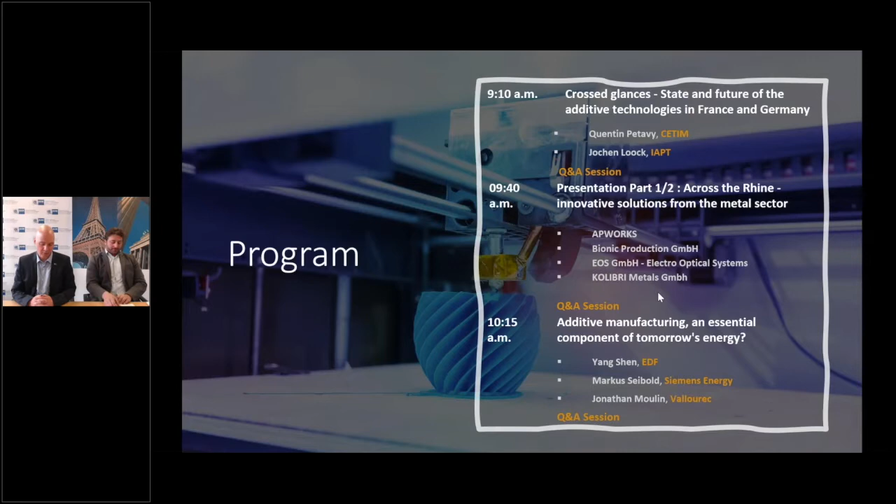I would also like to remind that this is the 7th event in a row which turns around the digitalization and the industry 4.0. And you all know how important that aspect is in current life. And I think we also see how the coronavirus and all the pandemic development has even now accelerated, in many ways and areas, that industry and that technology.

And interesting enough, it's, as we all know, not only affecting one industry. This is really a broad issue covering all industry, all branches. And we also see that it is affecting a lot of companies, from startup companies having developed maybe a competence, a technology in one area, but also large companies, as we will see during the next 2 days.

Maybe to remind you just who we are, the French-German Chamber of Commerce here in France. We are about 900 members on both sides of the Rhine. We are covering all industrial areas. Therefore, once again, I think this topic is very relevant because it speaks to a lot of our members, to a lot of our customers as well, who are really affected and dealing on a day-to-day basis with that technology.

Just about my background, I have a master's degree in mechanical engineering at the National Engineering School of Saint-Etienne, in which the last year was dedicated to additive manufacturing, where I was redesigning ball bearings for the automotive industry for additive manufacturing. I then joined CETIM as additive manufacturing engineer to work on the metal binder jetting process. And I'm currently involved in the Additive Factory Hub platform, as Guillaume said, to work on laser powder bed fusion and more specifically on the wire arc additive manufacturing process. So now I will present CETIM and CETIM activities. We can go to the next one, please.

So just a few words about CETIM. CETIM is a technical center for mechanical industry, which is situated in many parts of France in order to be the closest to the French industry. It was created in 1965 upon request from French mechanical industry in order to improve their competitiveness.

It is a regional, national, and international player with more than 1,000 people working there, with a turnover around 150 million, which is divided in two parts: a private research and development activity for companies and collective research and development activity for all the French industry.

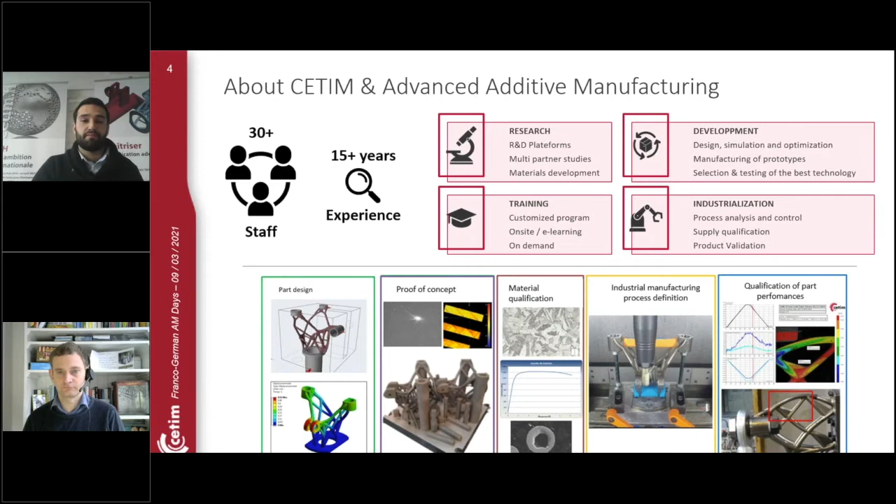So as you can see at the bottom, from the design, generative design, simulation and optimization, to manufacturing, proof of concept, and then selecting and testing the best technology for your product. We can do training, which is customized programs, on-site, and e-learning as well. And we can go on to industrialization and qualification of the product to product validation. So I will give the floor to Jochen.

Thank you. So my name is Jochen Loock. I'm working at the Fraunhofer IAPT. For 4.5 years I was responsible here for the academy, but recently I changed my activities into business development and consultancy for automotive. And it's a pleasure for me to shortly introduce our institute and then discuss some trends here.

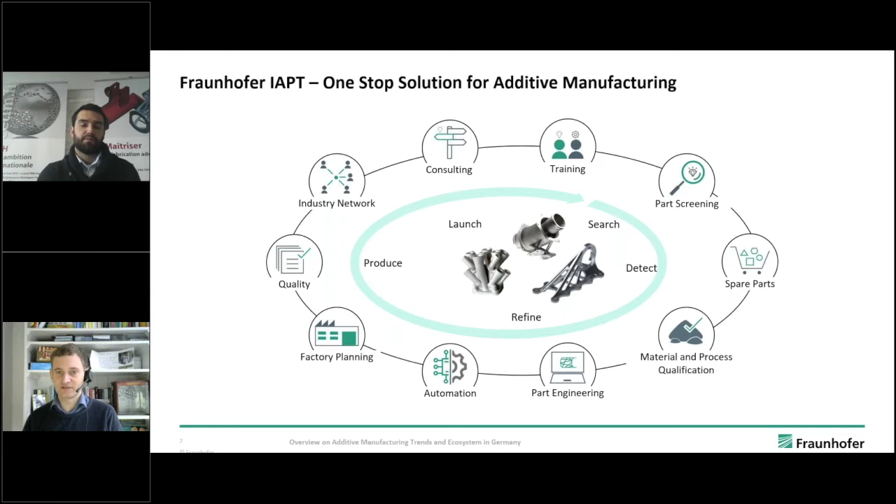So our institute, Fraunhofer IAPT, stands for Additive Production Technologies. It's located in Hamburg, and I think we are well known for our pilot projects with industrial partners that we have done in the past, also recently. Our services include everything that is needed to implement additive manufacturing, starting with training and part screening services, going into engineering of parts, automation of post-processing, and quality assurance. So we are covering everything that is needed for industrialization of additive manufacturing.

So just a few words about the general market landscape in France. The French ecosystem is composed of mechanical companies, which gather machine manufacturers, manufacturing services, software suppliers, research institutes, and universities. It's kind of the same ecosystem as in Germany; Jochen will explain it later. But for some processes, maybe it's less mature, such as laser powder bed fusion.

A fact in France is that democratization and appropriation of additive manufacturing in industry requires large and multidisciplinary research and development skills. And there are few private companies that can develop research and development programs by themselves.

With the COVID crisis and with liquidity problems, it's necessary to coordinate, mutualize and share resources and problems on additive manufacturing research and development topics in order to ensure the development of the sector. And that's why CETIM is a key partner of this ecosystem, regionally and nationally. And we are coordinating different activities in which we are mutualizing research and development activity.

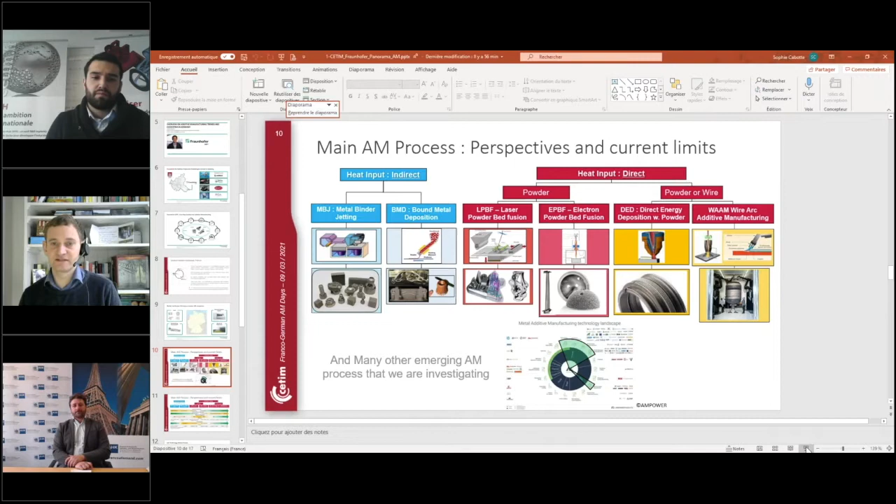So what I see in terms of technology is that laser powder bed fusion matured a lot over the last years, and it's still not where conventional manufacturing technologies are, but I think we have a baseline maturity that is sufficient for small serial production, for example in aerospace and automotive, or at least very close to it. Some players are a little bit in front, some a little bit behind.

And I think there are also new technologies in metals that are getting maybe in future, or maybe even now, some breakthrough. I see, for example, the DED process, which in my feeling is getting its breakthrough at the moment or very soon. We're seeing more and more applications here, and it's going out of the niche application of coating, for example.

Binder jetting is, I would say, maybe the hottest topic at the moment. It's highly investigated in automotive because it's scalable, and it's maybe the additive manufacturing process most likely to go into full-scale serial production, with a better cost advantage than laser powder bed fusion. I say maybe because there's still a question mark behind this, because binder jetting is not as mature yet as laser powder bed fusion and has to overcome some hurdles.

Also, I don't want to forget polymers, which are sometimes a little bit overlooked. I think most of the money that is earned today is actually earned in polymers. For polymers, it's really an established, cost-efficient alternative to injection molding for small lot sizes. So the projects I saw where a lot of money is saved are often polymer projects.

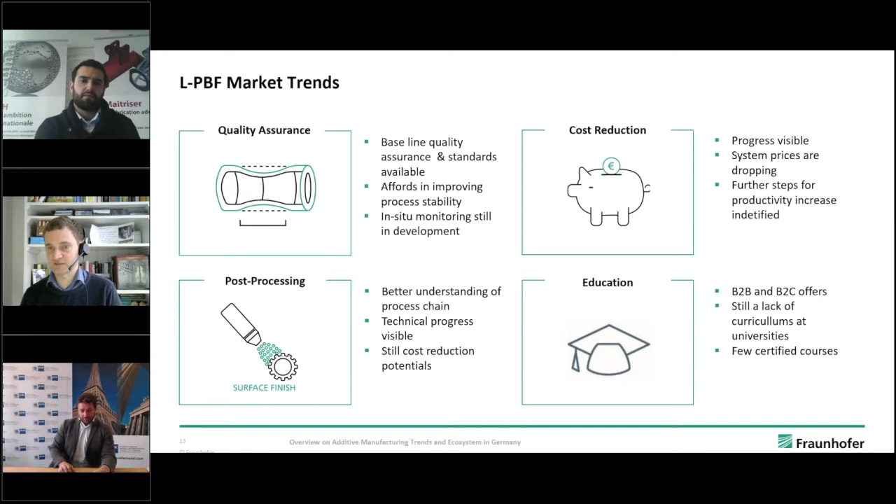Okay. Yeah, I think this is not 100% technology trend, so maybe it's good time for Quentin to continue. Yes, thank you very much, Jochen. I think it was your turn, Quentin, now to actually share your thoughts on technological trends. Yeah. Could we just go to the slide?

So as Jochen said, the cost reduction is really important in order to industrialize additive manufacturing. That's why indirect heat input processes are emerging, like metal binder jetting, which is scalable and could be a good process for mass production. It could be used for automotive, but for the moment it's a process that is not mature enough compared to laser powder bed fusion, and laser powder bed fusion is highly efficient when you're looking for performance. And there are other processes such as DED, which are really interesting for aerospace and energy sectors, in order to produce maintenance components or near-net shape components. And there are also other emerging additive manufacturing processes that need to be investigated.

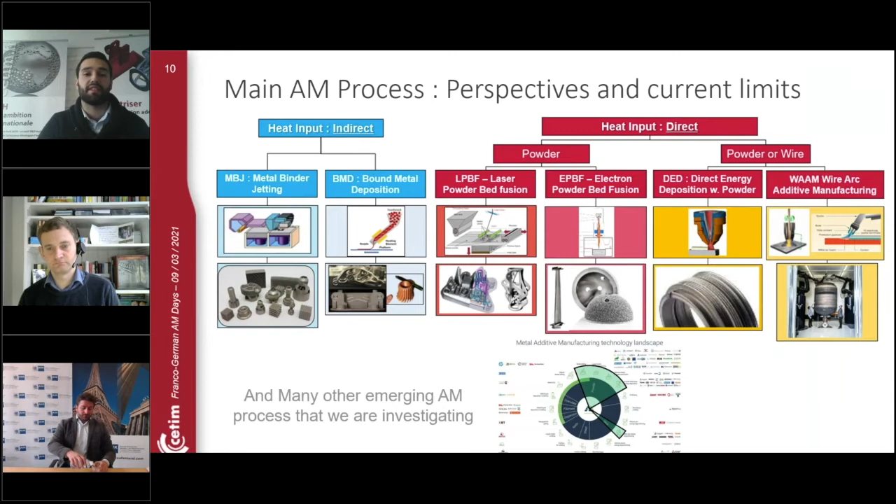So you have to keep in mind that before going to additive manufacturing, you have to select the right process depending on your product. If you're willing to do small parts, maybe binder jetting or laser powder bed fusion could be the right process. If you want to do large parts with several cubic meters, the DED process will be efficient for your application. Then the surface roughness is better for indirect processes, but it's a compromise with part performance.

And then you have to look at the productivity. For binder jetting, you can see that the productivity is around 100 cubic centimeters per hour, and the machine manufacturers say that it could go to 12,000, which is just an announcement for the moment, but it's really scalable. And then you have to choose between the cost of this technology.

Thank you very much, Quentin and Jochen, for this input. So you've already started answering a few points of the next question, which was perspectives and current limits of additive manufacturing. Are there any things you would like to add to what has been said, or would you like us to move to the success stories you wanted to present?

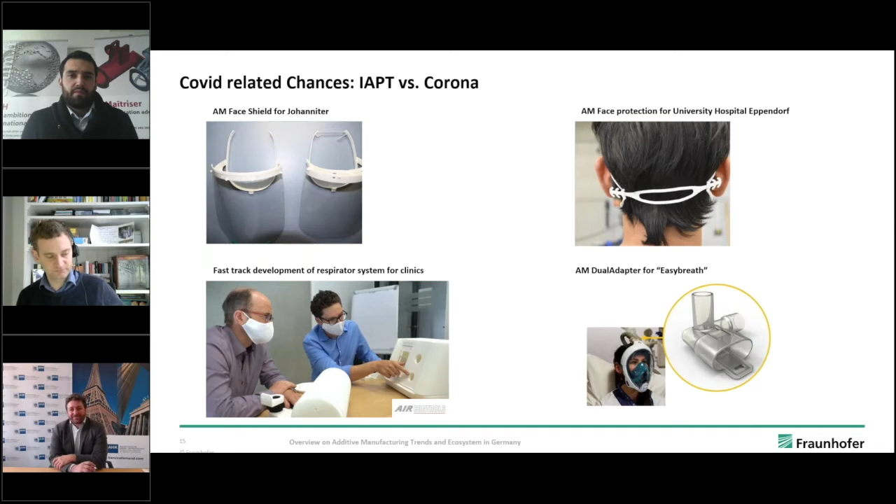So it's just to say that despite the COVID crisis, the companies that were involved in additive manufacturing keep working on it, and we have a few success stories in France. It's the case with Naval Group, a French company that has integrated its first additive manufacturing propeller made by WAAM on a French Navy boat, which is a really good thing. And Safran for aerospace plans to open its additive manufacturing plant in 2021 in France, next to Bordeaux. And even smaller companies keep working on it, as is the case with EAC, a luxury components manufacturer, which has integrated its first metal binder jetting to produce parts for industry.

So innovation has been slowed down due to the health and COVID crisis, and that's why it's also important to mutualize resources and share problems in order to ensure the development of additive manufacturing. Thank you very much, Quentin. It is true that, as you said, it goes through all sectors, and we do hope that it keeps going like this. And as you said, it would be good that people share their experience and knowledge in order to have the industry move forward.

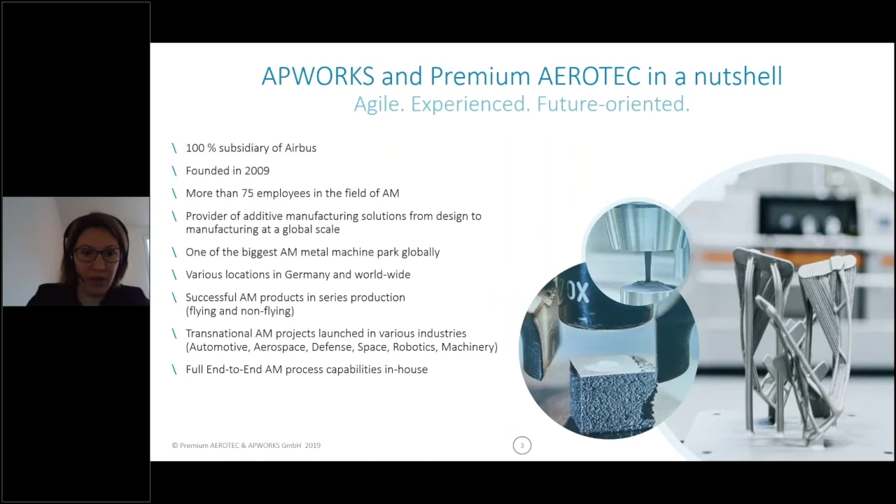So we have one of the biggest machine parks globally. Here you can see the 9 machines we are working with. We are dedicated to aluminum parts, Scalmalloy parts, and AlSi10 with quite a big chamber volume, like 400 times 400 times 400. We can support you from the beginning to the end, from the design of your part to improve the performance of your part. We have a dedicated engineering team for that, to the machining process. And every step of the production or of the development is done at one place. So this allows us to have very short lead times for our customers.

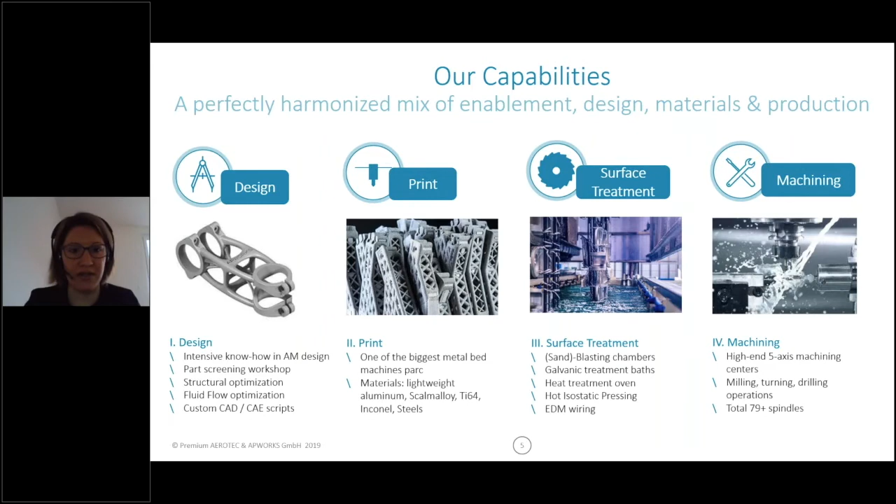To produce in a good quality is, of course, a good start, but we want it to be innovative. So these are typically the three directions we develop. Why can't you see my screen again? What happened?

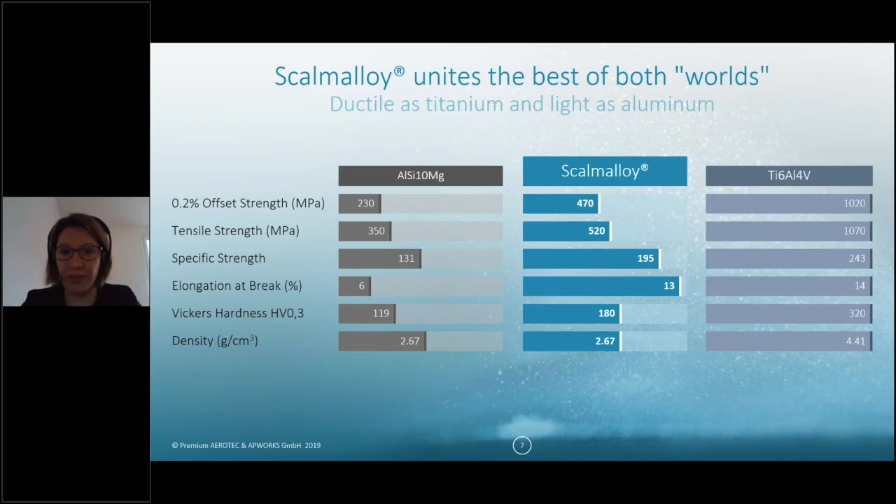So as I told you, we have three USPs. The first one is Scalmalloy, which is the strongest aluminum alloy, developed specially by Airbus for 3D printing applications. You will notice the specific strength, which is quite high for an aluminum, but you benefit also from good ductility similar to titanium. The next one is the 3D surfacing process, which improves the surface quality, because you know AM parts have a rough surface.

So this is a polishing process made with chemicals. And the last one is a system to join metal parts to composites. So we basically added some pins on the metal parts to make the junction. And of course, at Airbus, we did a lot of tests for this, and the tests show that the result is very good compared to the traditional way of bonding.

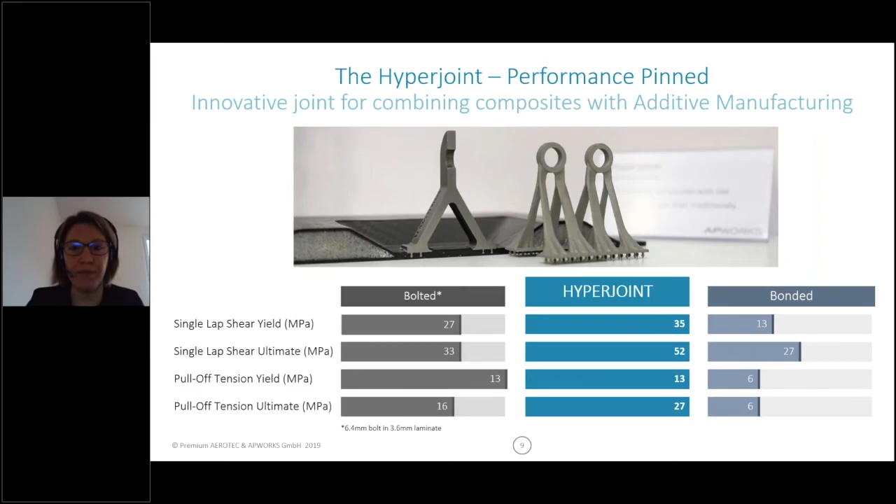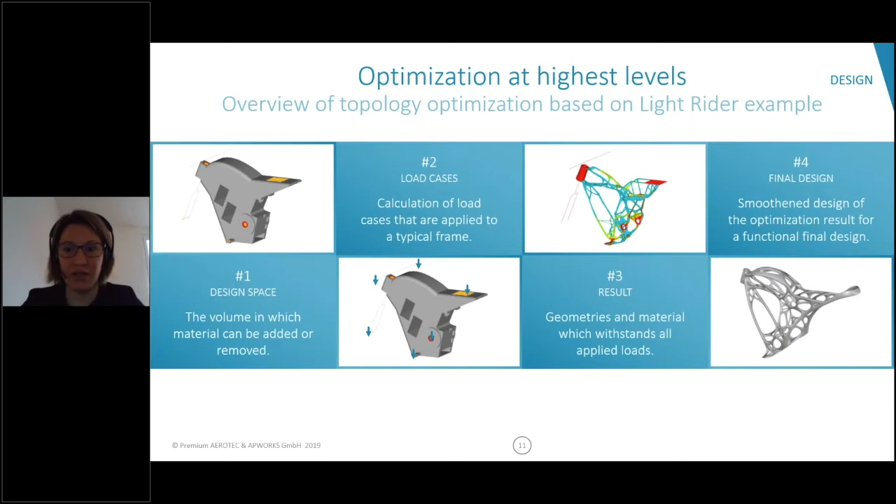So because of our origin, we focus first on aerospace applications, from military airplanes but also civil airplanes like the A350. A trend is, of course, the flying taxi. We equip the Airbus city taxi with this plate, and also some applications for satellites. Our process for titanium parts, as I said at the beginning, is fully qualified from the product to the NDT, according also to Airbus and EASA standards.

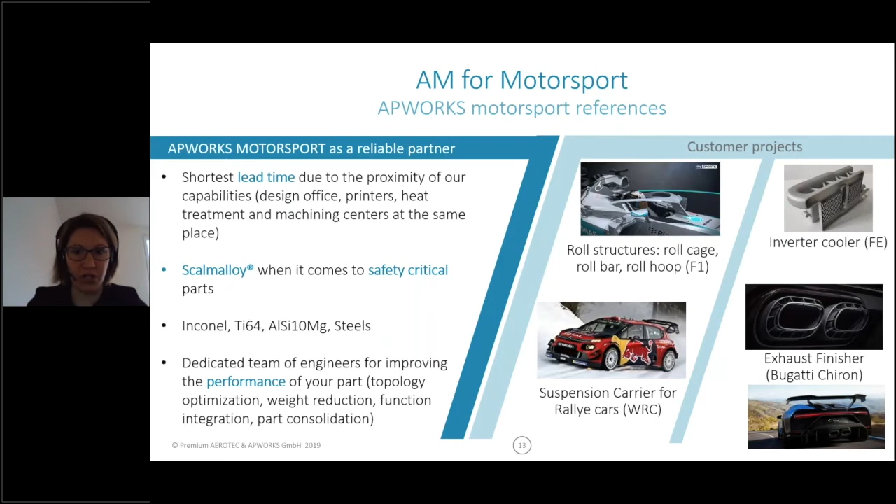The next field, which is also a big one, is motorsport, especially when it comes to shorter lead time. And Scalmalloy especially makes sense for safety critical parts like roll-over structures. And you may also have noticed our effort on the Bugatti exhaust finisher. Also some thermal applications with a lot of development work, and also for electronics components.

And the next and last one is about general industry. We are looking also at other fields like oil and gas, sailing racing boats, robotics parts as well. And we also developed last year this toolset in order to produce customized products. And we have, of course, many more customers.

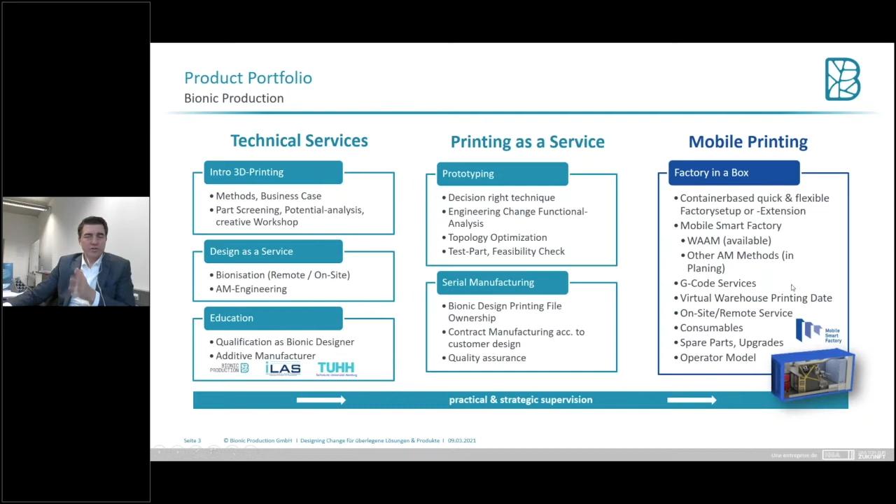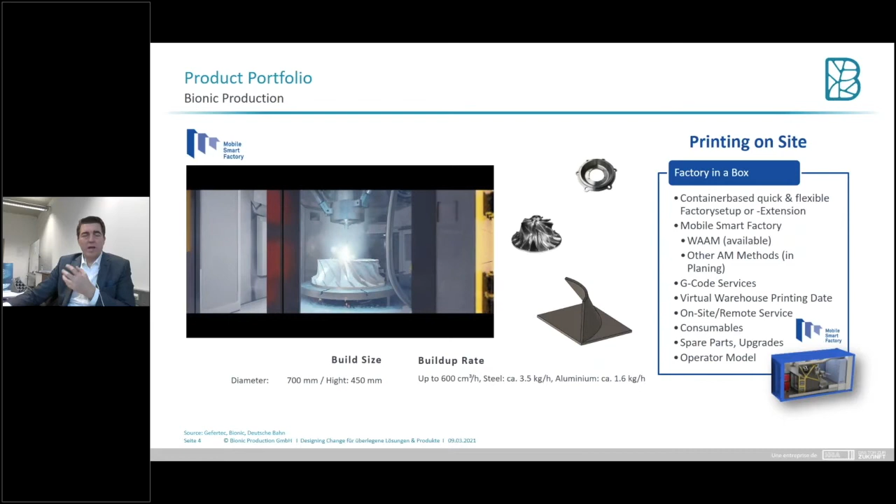The third step is mobile printing. That's a completely new business that we established roughly 1.5 years ago. In very easy words, it's a 3D printer in a container. This mobile system uses WAAM, wire arc additive manufacturing, where we can produce bigger components, as you see here in the middle, with dimensions of 700 by 450 millimeters. These components are very useful in the oil and gas industry, the mining industry, and the rail industry. The system is also very useful for hybrid repair jobs. And this system is also part of our business.

For example, we have a project running right now with a huge bus and truck company who is copying this concept into the front bumpers of their buses to have better results during the crash test. This is an idea, a pattern from nature that we copy into technology.

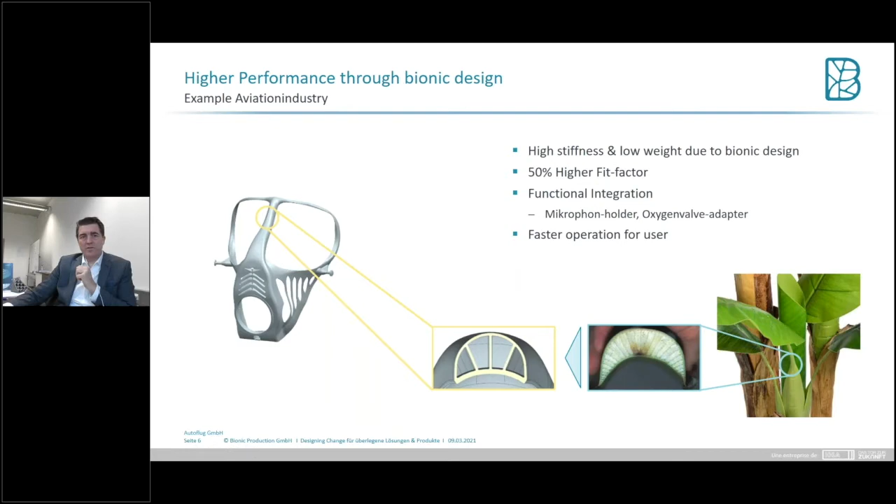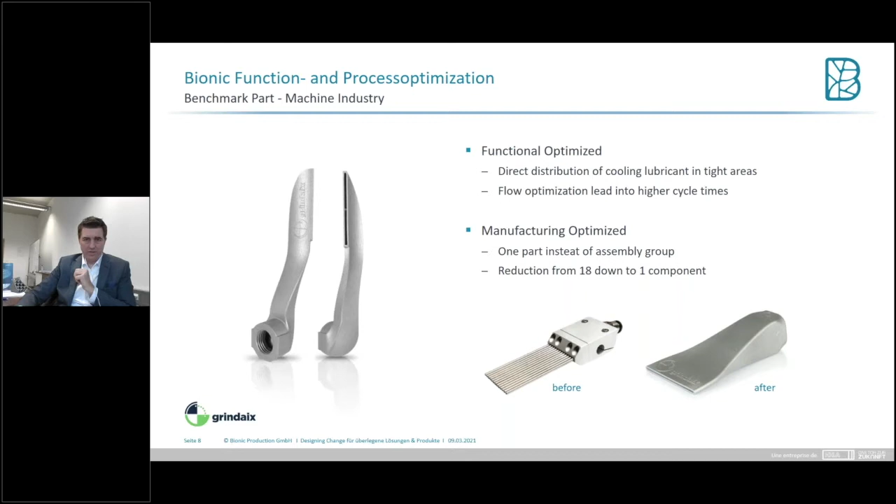Another example is for fluid and flow optimization. That's a nice example where we combine several components into one and have a better design of a cooling lubricant that can be transferred to the right point of use, and also achieve functional integration. That's classical AM design, combined with flow optimization from the bionic side. So that's all from my side.

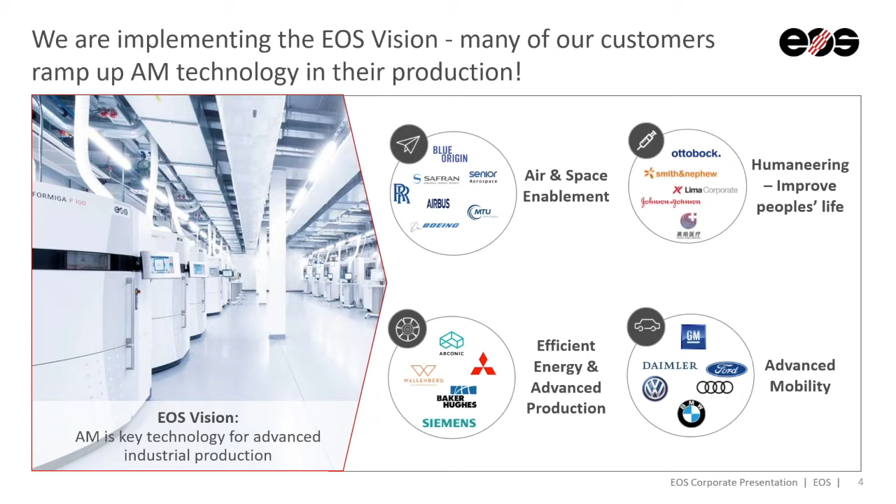What is our vision? Our vision is that additive manufacturing is the key technology for advanced industrial production and the key technology for digital factories of the future. As you can see, several customers have already ramped up this technology in their production along different industrial verticals, so aerospace, humaneering, mobility, and energy. And what do these industrial companies have in common? They are facing similar challenges such as faster time to market, productivity increase, need for cost reduction, flexible production, innovation, customization, and sustainability. And additive manufacturing is exactly providing unique advantages for those challenges.

As you can see here, three key advantages: freedom of design, so lightweight, bionic structures, as has also been explained before, functional integration, and customization. We have the freedom of materials, both, as I said, metal and polymers, and we have the freedom of manufacturing, digital manufacturing, but also, especially in the frame of COVID, becoming more important, distributed manufacturing. This means decentralized production.

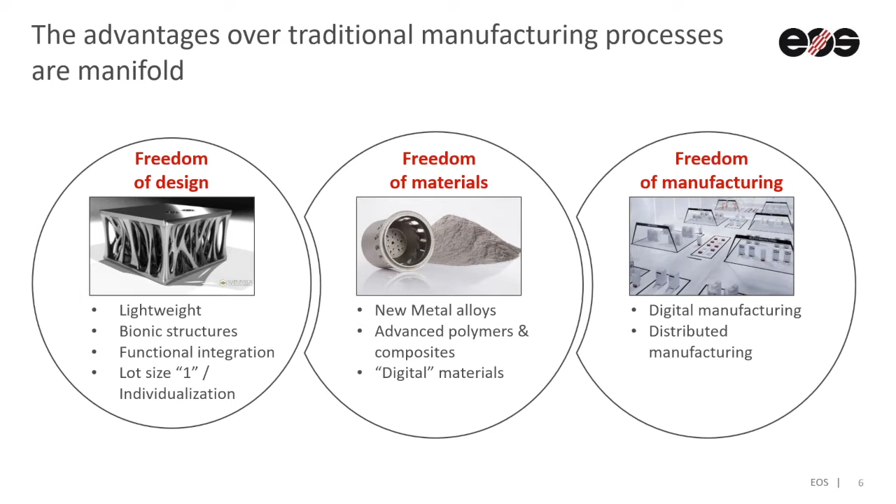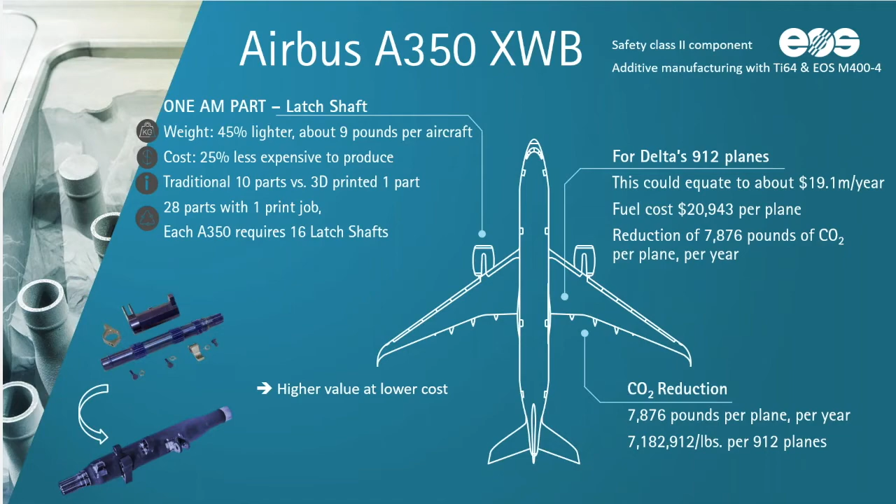We have several other examples, also in the humanitarian, medical, and energy, as well as in the polymer industries. Also the well-known mascara brush, where we were able to produce actually 80 million parts. So as you can see, the technology is a very democratic technology. It's crucial for small companies, for bigger companies, for small production, but also for bigger production lot sizes.

What's next is a peek into the lab, which I would like to share with you. So we are not talking anymore about 1, 2, 4, 12 lasers, but about 1 million laser diodes. That's our new technology, where we will be as productive as injection molding. So we can increase the production speed by factor 10. We have lowest cost per part. And that's a good example of how we can realize customization of mass-produced parts utilizing the benefits of 3D printing. Just to give you an indication, if you have a part the size of your fist, we will be able to print it in 9 seconds. And there you can derive that it's no difference if you print one part, 10, 100, whatsoever.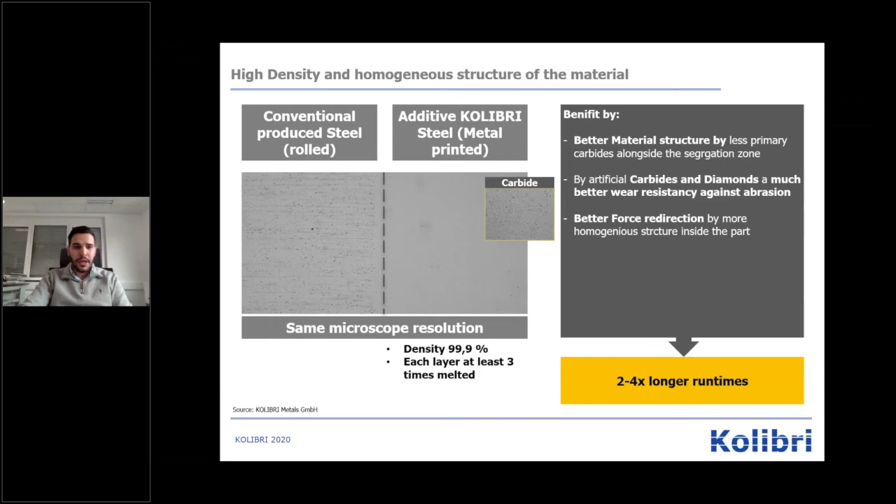And what we also do is we put into our material carbide or diamond powder to have a much better and higher hardness, which allows us to have much longer runtimes for our materials and for the parts we produce. And we also want to show you a classification of our material to give you an idea. You can see on the following slide that we have the same toughness and feed speed as coated HSS, for example 1.3343. And we have the same hardness as hard metal, and that makes our material pretty unique when it comes to wear resistance and hardness, of course.

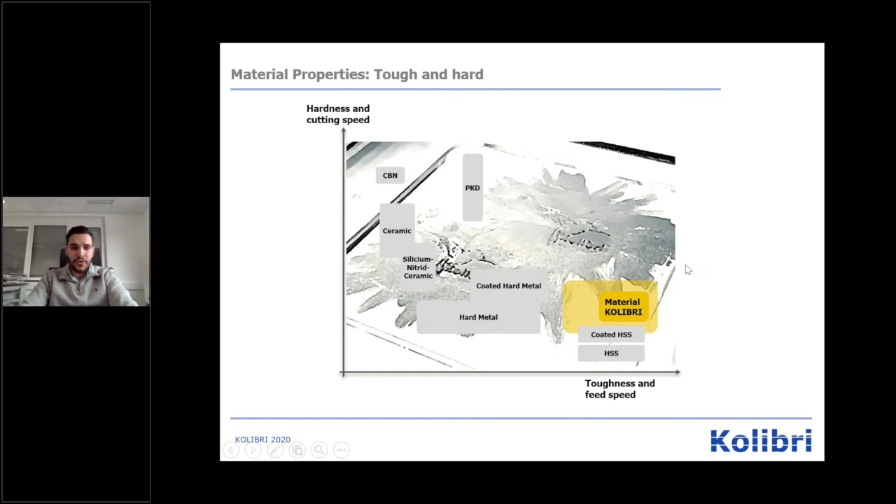It was really difficult to show you one example, but we decided to show you our roll jaws. Roll jaws are used for screw production, and we work with all the big manufacturers for screw production.

Do you still see my slide? Okay. Yes, we can. Please go ahead.

Yeah. Sorry. Like I said, it was really difficult to decide which showcase we would show you. But we do cooperate with all big manufacturers for screws. And what you can see on this slide is that we usually build these as hybrids, meaning we add our high value material on a grinded surface of a less valued material, which allows us huge lead time savings. For example, a roll jaw needs up to 8 or 12 weeks in development processes. We reduced that to 1 week, including heat treatment.

And we also noticed, since we worked with a lot of customers, that the material we mix, including carbides, is much more resistant against abrasion. So we increased the time of use by about 100% in some cases. It depends, of course, on what kind of screws they are producing with these jaws. So it isn't difficult for us to double the lifetime. Also, before we start to produce these jaws with our material, we dry our powder. We dry it because that's another business we are working on. We dry our powder to have fewer cracks in our parts.

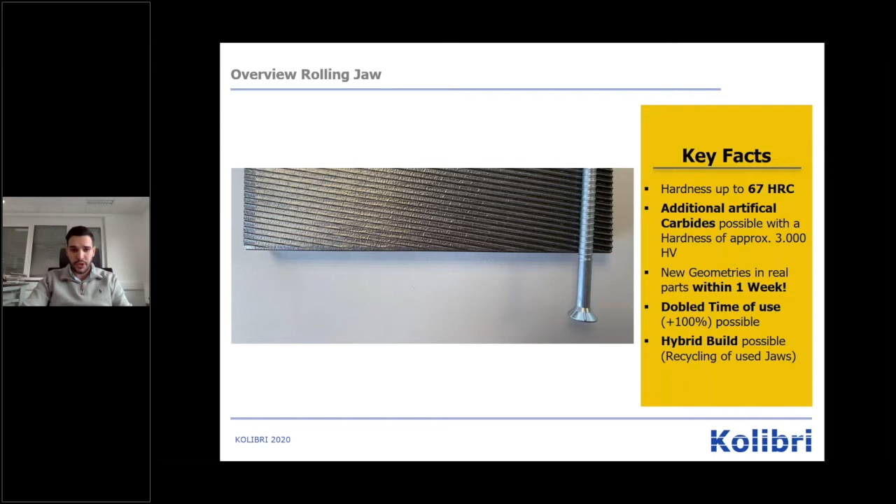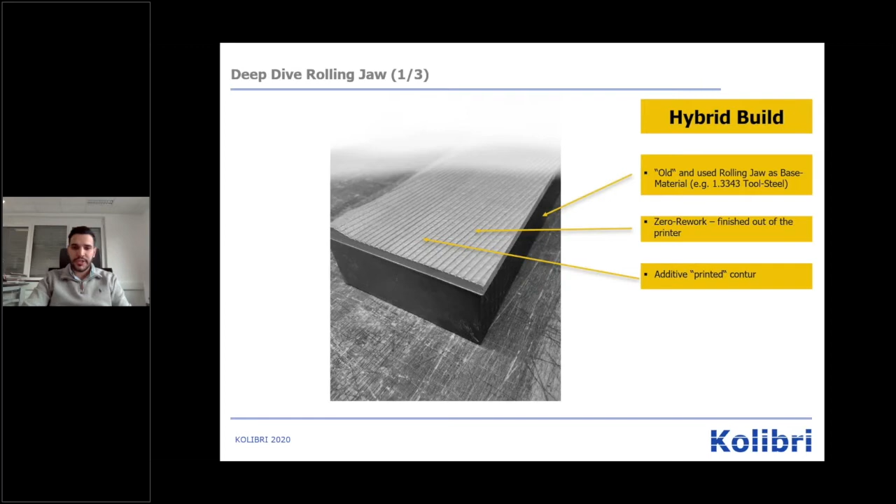And as you can see, the surface of the roll jaw is unique, and you do not have to rework it. So you can take the roll jaw right out of the machine after production, send it to heat treatment and send it to your customer. And again, it's a perfect picture of how it works. You have on the bottom the grinded low valued material, on the top our added KOLIBRI material. And yeah, that's all. If you are interested in anything or have questions, just let me know. Thank you.

Thank you. I think it will be all from my side. I give the floor back to you, Guillaume. All right, thank you very much, Julie. We are perfect on the timing this morning. Quite amazing. It's always very hard to keep a good timing on events, but everybody's been actually playing the game, if I may put it that way, this morning.

So that's all for the first pitch session. For those who have the B2B meeting this afternoon, I'm sure you'll be able to exchange with those companies. And for us, it is time to jump to the second panel of the morning, on which we'll ask the question whether AM will be an essential component of tomorrow's energy. To discuss that matter, we'll have 3 very high-level individuals with us.

So we welcome today Mr. Markus Seibold. Markus is Vice President of Additive Manufacturing at Siemens Energy, as well as Material Solutions. Hello, Markus. Thank you for joining us. Hello. We'll have with you Jonathan Moulin. Jonathan is the wire arc additive manufacturing product developer at Vallourec. Good morning, Jonathan. And last but not least, we'll have Mr. Yang Shen with us, who is a project officer for additive manufacturing at EDF. Hello, Yang, and thank you for joining us as well.

So before going into the questions, we'll do as the previous presentation, meaning that I'll ask you to present briefly your company and mostly your actual state in additive manufacturing, your applications, best practices, and afterwards we'll move forward with the questions. So we'll start with you, Yang. Can you please start with a brief presentation of EDF and your applications in additive manufacturing? Okay, can you hear me? We can hear you clearly, yes. Great, thank you very much.

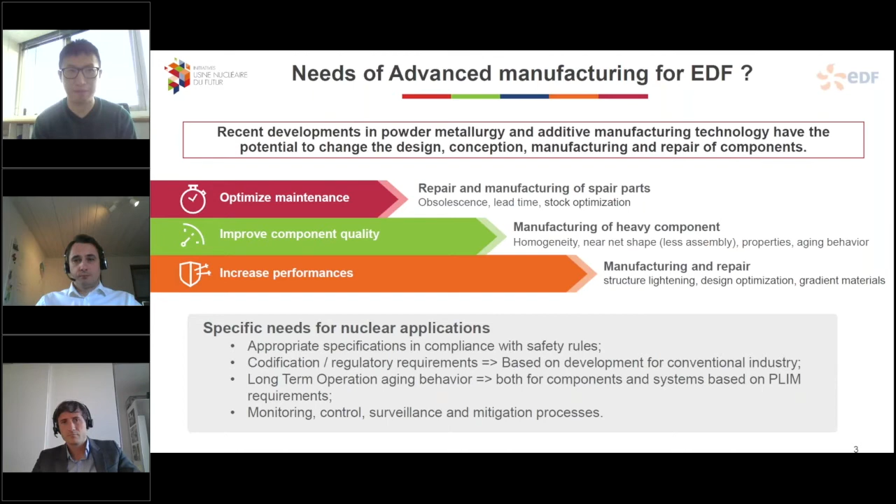Just some examples of specific needs for nuclear applications. We need appropriate specifications in compliance with safety rules. We need codification and regulatory requirements, based on developments for conventional industry. And also specific needs about long-term operating aging behavior, both for components and for systems, based on plant lifetime management requirements. And last but not least, monitoring, control, surveillance, and mitigation processes are also needs for EDF to develop additive manufacturing. Can you go to the next slide? Thank you.

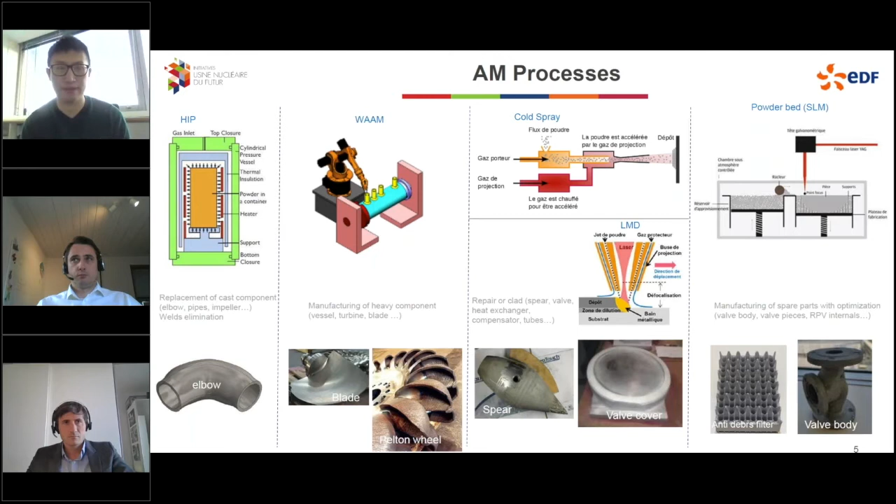Okay, so at EDF, we are supported by industrial and academic partners to use our skills in metallurgy, mechanics, simulation, and also other skills to understand the performance and limits of processes for additive manufacturing. So we are trying to use all this additive manufacturing in our nuclear and hydraulic power stations. And also we need the industrial sector to move towards the standardization and codification of additive manufacturing processes. This is very important. Thank you very much.

Thank you very much, Yang, for this clear presentation. So now to keep going with those presentations, I'll ask Marcus to explain where you stand at Siemens Energy and Material Solutions. It is your turn, Marcus, to tell us a bit more.

Thank you. Yep. Will someone bring up the slides? Yep.

All right, fantastic. So thank you also for the opportunity of being part of this conference. I'd like to quickly, as an introduction, explain how Siemens Energy is using and has been using additive manufacturing. So if we go to the first slide, first of all, Siemens Energy is a bit unconventional, I guess. We are living a dual business model. We are on the one hand a user of additive, and at the same time a service provider to other industries via our Materials Solutions business.

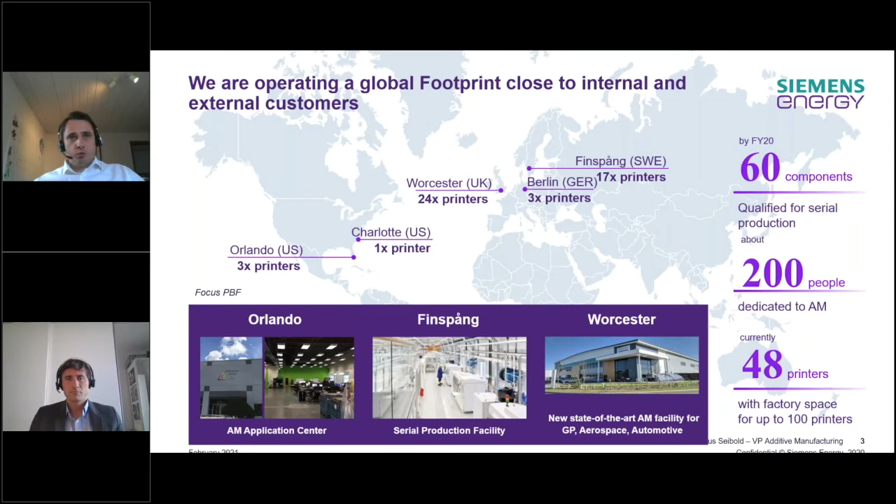We have 48 powder bed fusion printers installed across our footprint today. More than 200 people working on AM, I said that before. And we have factory floor space for up to 100 printers that we are currently working on to ramp up. And if we go to the last slide, that's a bit the story of how we use AM on the specific use case of our large gas turbines.

We have multiple challenges on the product side and on the supply chain side. We need to become more flexible in fuels to afford sustainable energy fuels. We need to reduce emissions, and we need to increase our combustion temperatures to drive efficiency and power output of our products. And on the supply chain side, we need to become faster in repair. We need to get faster to the market with new technologies. Spare parts need to have accelerated availability.

And all that together drives us to an additive strategy. Currently 2% of the value of one of our products is addressed by additive, and we are at the beginning of this journey. We want to increase that share over the next 3 years to over 20% of the value of a gas turbine being addressed by additive. We do that by working on rapid prototyping. We focus on rapid repairs, so we can repair faster and more cost effectively, and support our fleet with spare parts on demand. Then we talk about substitution of current parts.

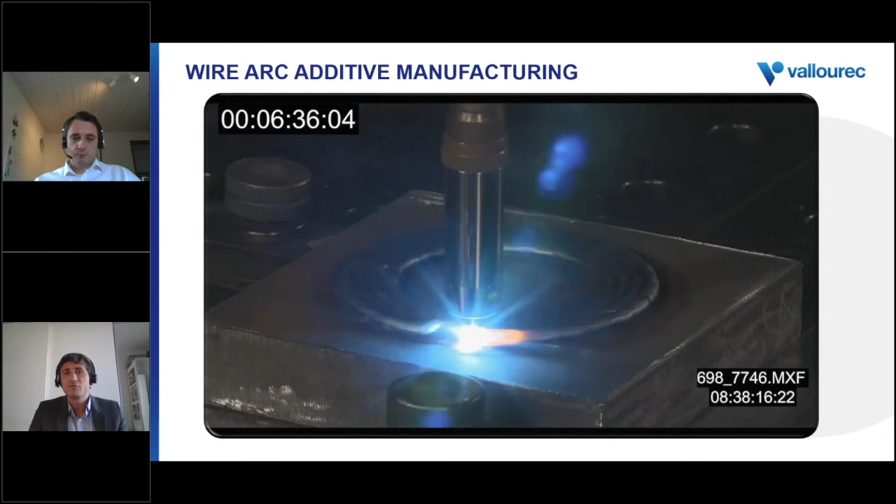So to talk about Vallourec, I don't know how many of you know this company, but this is a tubes and pipe supplier, mainly dealing with the oil and gas market, providing services and solutions for this business. Vallourec has been active in additive manufacturing since 2016, focusing on two technologies, which are thermal spray and wire arc additive manufacturing that you can see here. What is important is that the first step was made to cover our internal needs, to make our own tooling, and then of course to spread it to the markets that we are serving.

So here you can see a layer by layer metal deposit technology, where the mastery of the trajectories and the parameters is key. As mentioned, Vallourec is active mainly in oil and gas, so for energy, but also in the several markets that I have listed here: line pipe, maritime, railway, process, power generation, like for EDF and Siemens, and also structure and agriculture.

So now going to the main achievements. I put here two examples. The first picture is a crossover. It's an accessory that is used on the rig for oil and gas applications. It has been made for an end user, a customer. And as you can see here, this is a part of 350 kilos that has been printed, then heat treated, and afterwards threaded on each side and machined.

So what is important to keep here in mind is that the mastery of each step is important, and the key challenge for the industry, especially when we talk about the end user and the adoption of the technology, is to make the qualification of the material. So here, this is a carbon steel, but as it is AM printed, it's considered almost like a new material. So we have performed a lot of tests to bring confidence to the end user.

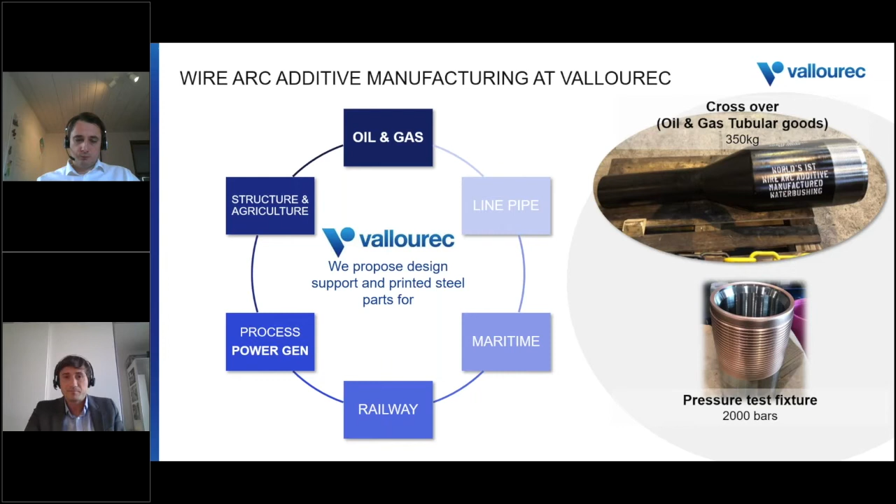So to be very short, what Vallourec is really trying to develop, with the different partnerships, because this is a common effort to be done with the OEMs, the manufacturers, the end users, and also with third parties, is to bring confidence to the industry. And the big point is to qualify the part and put in place the quality system that is needed so that the part can be validated and installed in the field.

So for that, the expertise, thanks to the historical business, is about metallurgical development, non-destructive testing, because of course you need to test that. Also digital, so we talk more and more about digital libraries, and all of that needs to be packed and discussed all together to make the big step with this technology. So that's it for me.

Thank you very much to the three of you. I think we all have a much clearer understanding of where you stand with additive manufacturing. Now we've planned on asking you where you think additive manufacturing has the most important role to play in your specific industries. So to answer that, I'll start with Marcus. So Marcus, where do you think additive manufacturing has the most important role to play?

And the big step then will come when we can potentially really go to 100% hydrogen as a fuel on gas turbines, because then you are by definition at zero carbon emissions. And the third element would be, in our future decarbonization fields, additive also might help us to unlock some of the design spaces there in order to bring new technologies to the market, which are eventually more environmentally friendly or economically advantageous. So those three dimensions would be my net zero carbon emission contribution from additive.

All right. So we can see that using the technology may actually help us to bring down this carbon footprint. Now, when we exchanged earlier on, we wanted as well to discuss the developments that are needed in additive manufacturing in order to further drive its adoption within the energy sector.

The idea is, of course, to increase the confidence of end users. What is, Yang, your point of view on that question? Okay, so at EDF, we are not a manufacturer, we are an end user. So by using additive manufacturing, if you want to use it in our industry, the first question we must treat is the qualification. The qualification of components versus regulators' requirements.

And also for the standards and codes, we need something in the standards and in codes, so we can be guided in our industry. And now we have some technical barriers. For example, first with the material, so reverse engineering, we must have confidence in the reverse engineering versus the design optimization, and also complex geometry, how to treat them, how to optimize our structure, our designs.

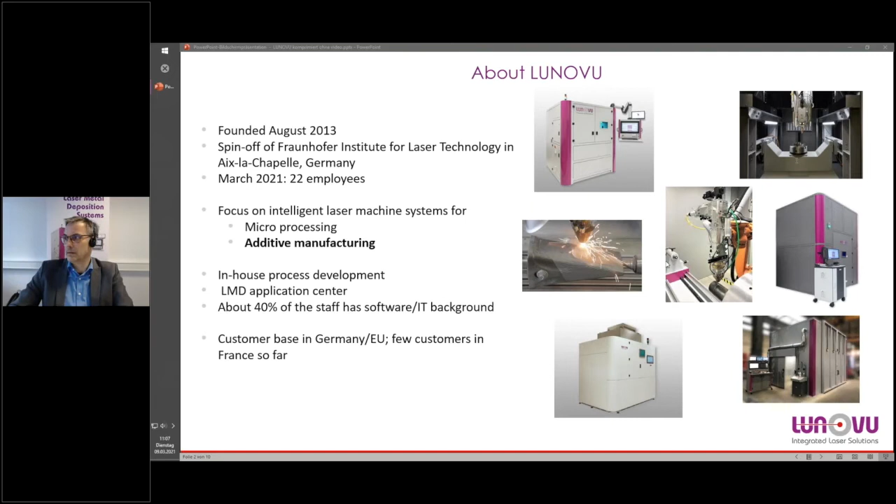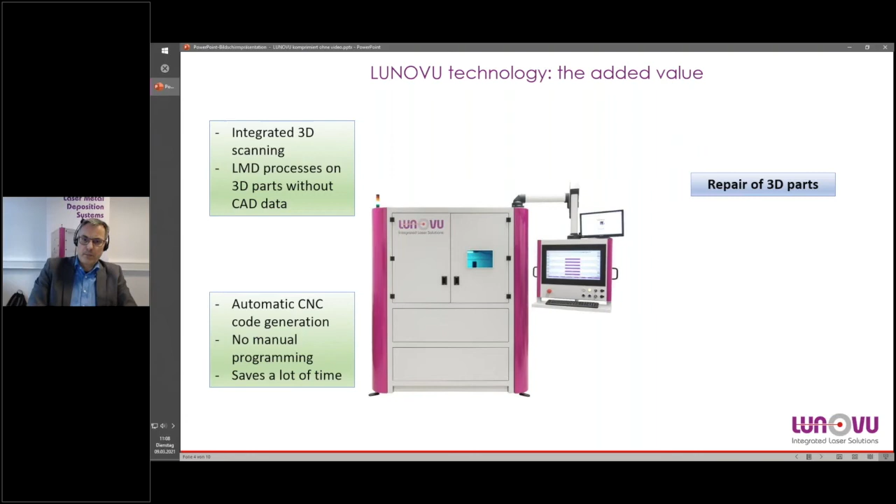So what is our technology and what is the added value? So the most important thing is there's no need to generate CNC code for our machines. It means there is no need for manual programming, and that will save a lot of time, as I will show you later. How do we achieve that? We achieve that by integrating a scanning technology into our machines, so we can carry out LMD processes on 3-dimensional parts without having any CAD data. And an application for that is, for instance, the repair of 3D parts. But we are also able to print 3D parts on existing 3D parts. That's very interesting. And further, it is possible to coat parts, and I would like to show you an example for that.

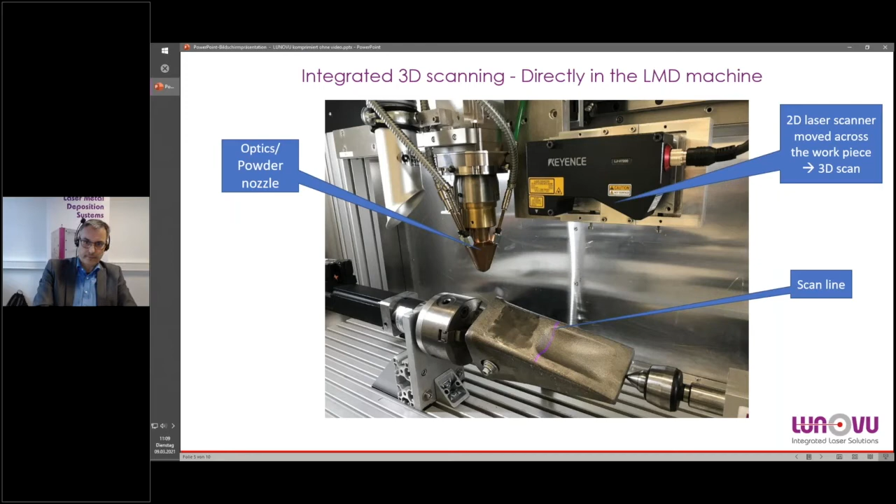So this is the setup for my example. So you see an excavator tooth, that's the workpiece, and here you can see the powder nozzle and the optics, and the line scanner. So the scanning line, you can see there, this blue line. And when we move this line along the workpiece surface, we can create a 3D scan. And now I would like to ask you to show the video.

Yes, we can unfortunately not hear you while you're commenting the video.

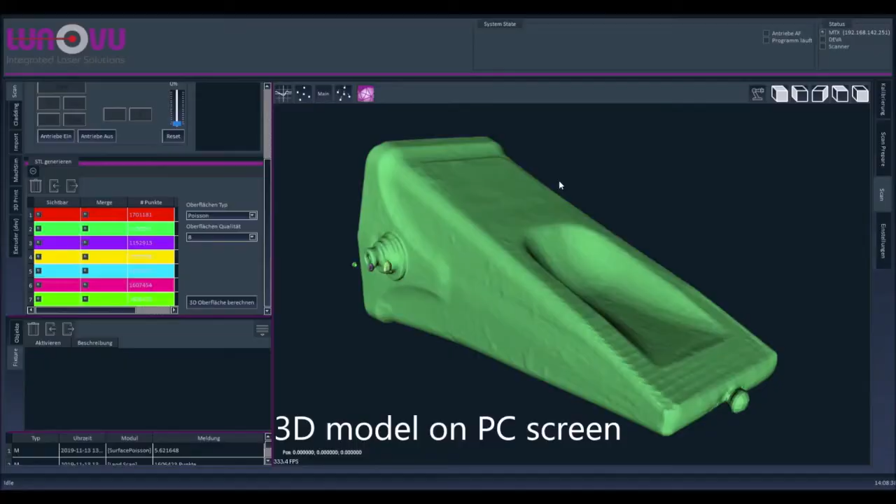I'm sorry. So we have here this excavator tooth, the workpiece, and now you can see how the scans are carried out. You can see the moving lines, and here you can see the digital twin. That means we have recalculated the part in our software, and now you can see how these tool passes are generated automatically. And in the next step here, you can see how it looks like in a simulation. So it is possible to check if everything is running properly or if there are collisions or something like that.

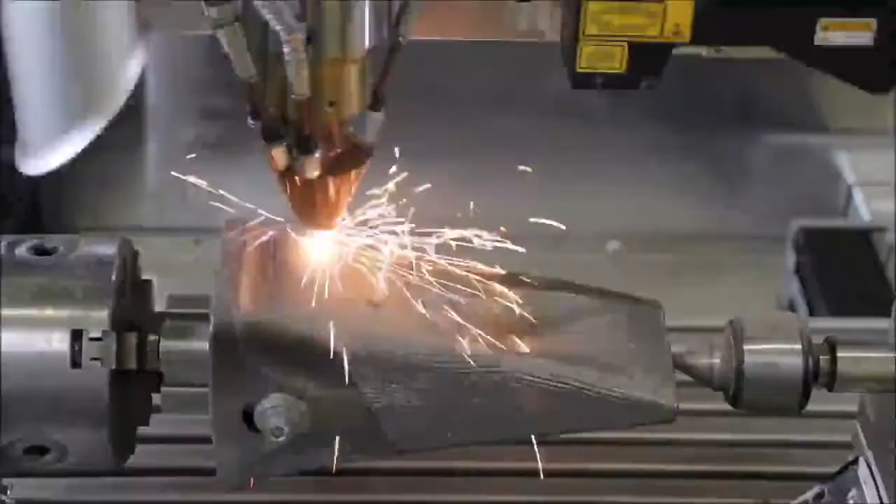And after it is fine with the simulation, we can directly step over to the execution of the real processing of the workpiece. So we have sped up here a little bit, but as you can see, we have a nice coating of our excavator tooth that is carried out now. And all carried out very quickly and with a good result.

Voila. Okay, so actually we can now go back to my presentation. Okay, I hope you can see it. I transfer my screen. The presentation is coming up right now. Great.

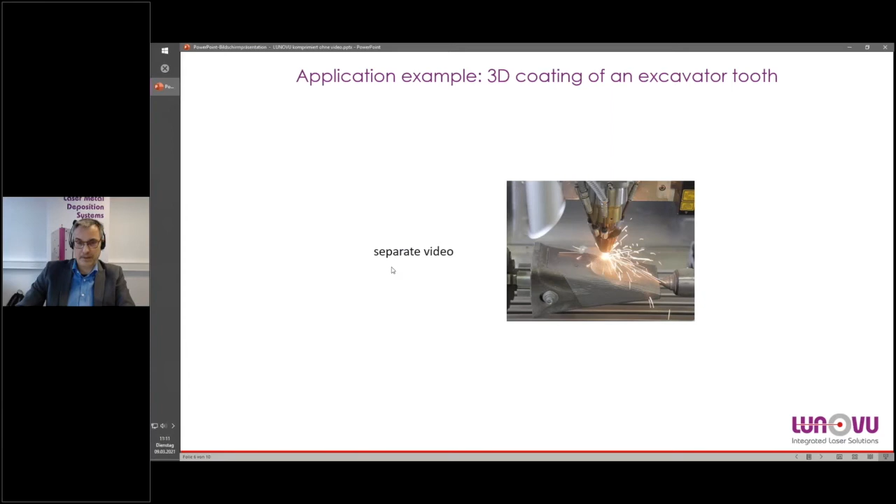So this is just a short summary. What we saw is that the time from the very first scan to the start of the processing just took us 4 minutes. So it's really a short time. As I said, we did not carry out any NC programming. We did not carry out any teach-in, and we had no CAD data of the workpiece in advance. And yes, of course, this application can be applied to other topics, but with the same way how to proceed.

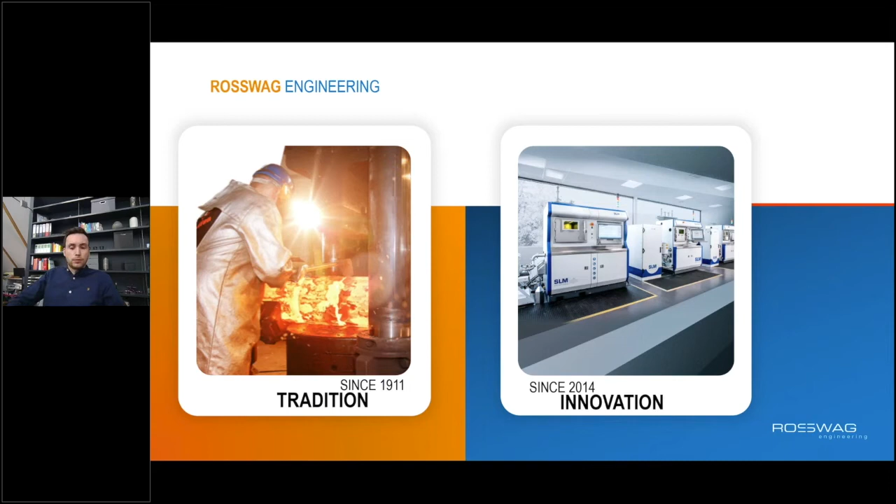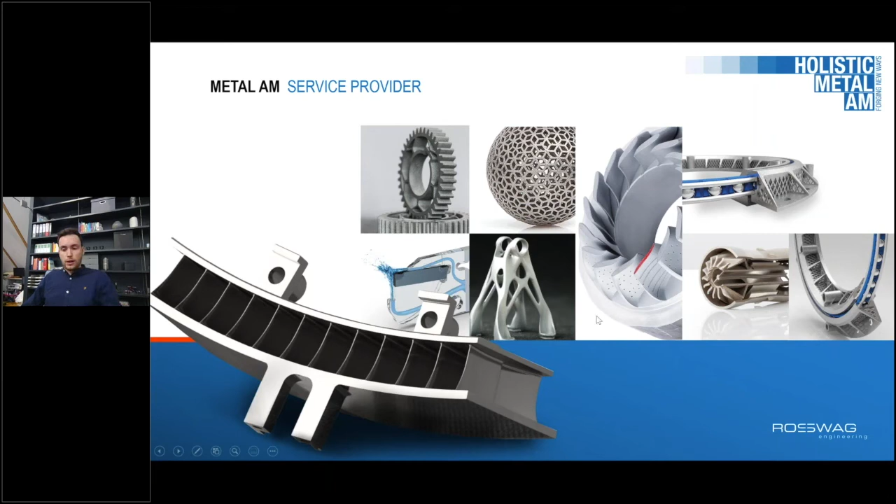And since 2014, we at Rosswag are fully focused on a holistic process chain for laser powder bed fusion. We are a service provider. Let me just go to the next slide. Exactly, so we're a service provider printing prototypes and serial applications for our customers. And what's the USP of our company is that we are very small size, but have a holistic process chain for metal AM in-house. Of course, we start with engineering and simulation services. We can simulate the whole process, but also CFD and FEM simulations for the design and the

development of new parts. And what's really special is that we have a small size atomizer for our powder production, and we can produce small amounts of new or special alloys between 5 and 50 kilograms economically, especially interesting for research institutes or for the qualification of new alloys. And of course, we have a laser powder bed fusion process in-house with machines from SLM Solutions, as well as different post-processing steps like heat treatment, CNC finishing, and a fully equipped metal laboratory to see the porosity, the composition of the parts and the powder, the mechanical properties and things like that.

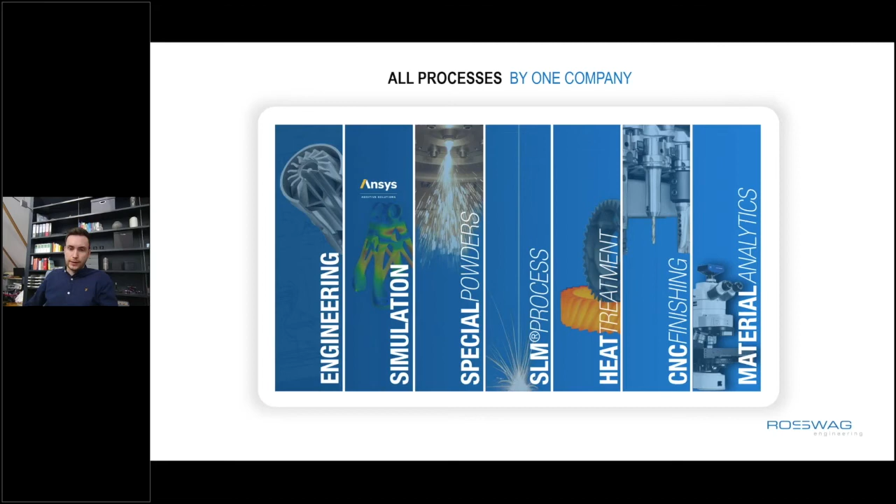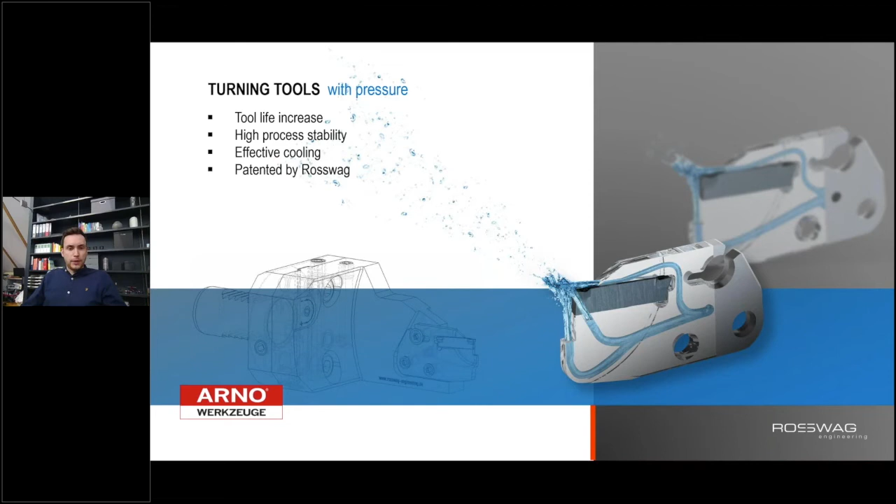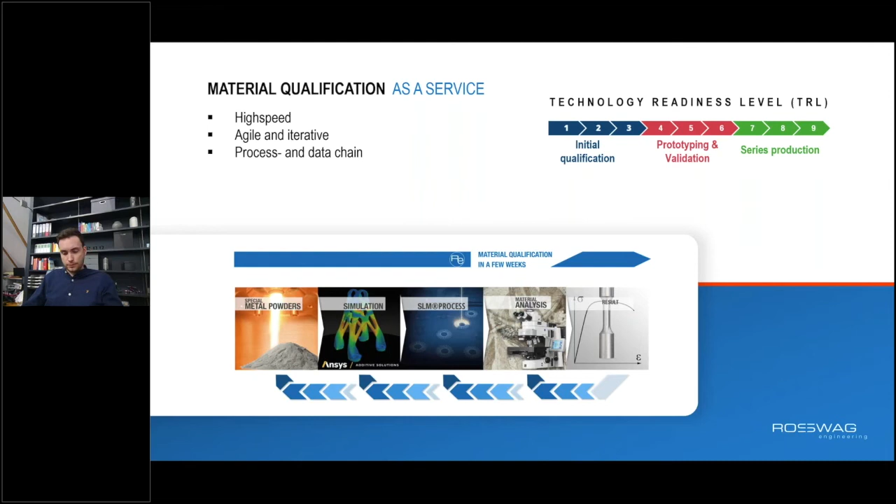Within the next minutes, I will briefly introduce our company, SMS Group, and our technology, which refers to additive manufacturing. SMS Group is a plant supplier, a worldwide leading partner to the metallurgical industry. With our products and brands, we cover the complete value chain in the metallurgical sector. SMS Group is a family-owned business with 150 years of experience this year and around 14,000 colleagues around the world.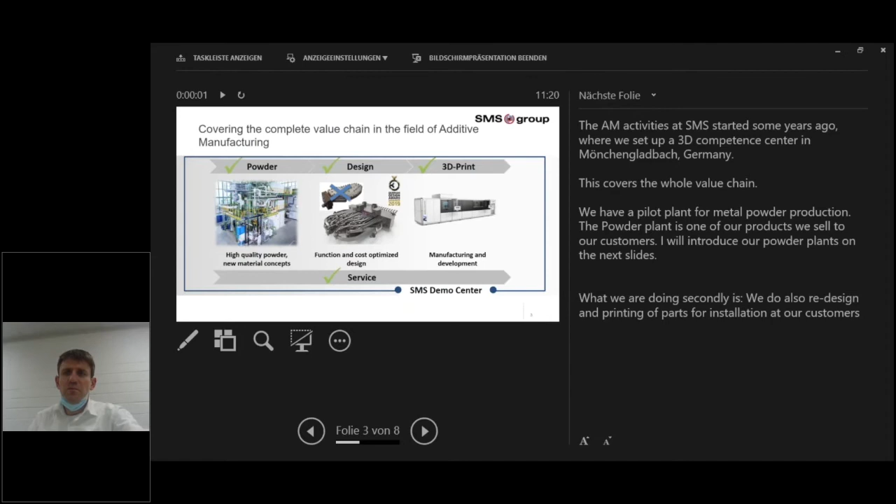But let's go directly into additive manufacturing. The additive manufacturing activities at SMS Group started some years ago, when we set up a 3D competence center in Mönchengladbach here in Germany. This covers the complete value chain. We have a pilot plant for metal powder production here in Mönchengladbach, and this metal powder plant is one of our products we sell to our customers as a plant supplier. I will introduce these powder plants on the next slides.

Secondly, we also do redesign and 3D printing of parts for internal reasons, for installation at our customers as parts of the plants or spare parts. Just to give you an overview of our powder plant technology to produce these metal powders: we offer equipment for gas atomization with and without vacuum, and also for reactive materials such as aluminum. In addition, we also sell plants for water atomization.

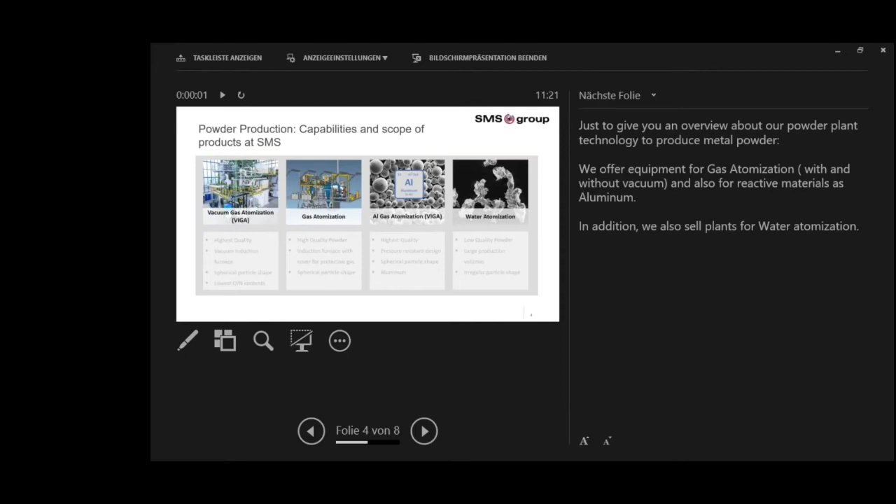But today, I will focus on our core product in this field. It's a VIGA plant, vacuum induction gas atomization technology. Gas atomization means that the atomization of the metal powder is under a gas stream, nitrogen or argon, and vacuum, as the melting is under vacuum, to guarantee the highest quality of the metal powder produced with our plants. As you know, in additive manufacturing you have higher quality requirements for the powders, and therefore you will need such a sophisticated plant. On the left side, you can see a picture of our pilot plant.

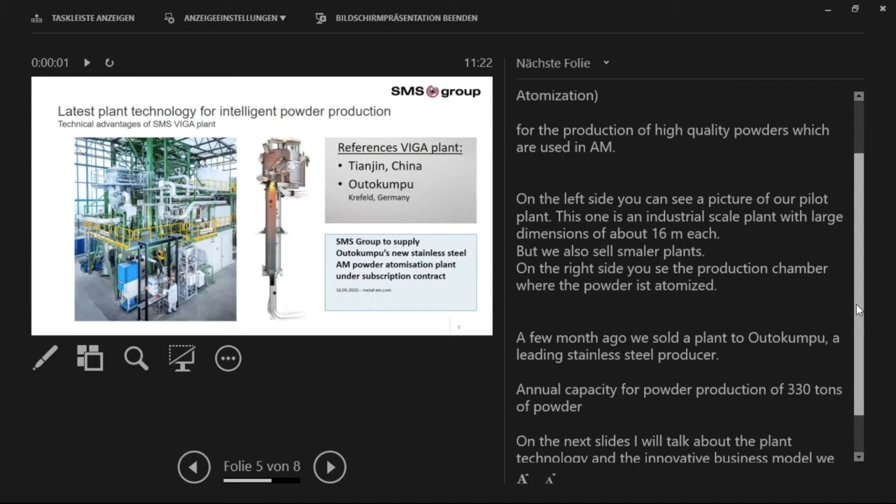This plant is an industrial scale plant with large dimensions of 16 meters each, but we also do smaller plants. One of our latest references I can talk about is that we sold a plant a few months ago to Outokumpu, a leading stainless steel producer, and this plant has an annual capacity of 330 tons of metal powder. On the next slides, I will talk about the plant technology and the innovative business model we sold to Outokumpu.

The technical and commercial advantages of the SMS powder plant technology can be summarized in four core competences. First, our plants produce the most advanced powders you can find, gas atomized powders with the highest qualities. You can see one of our powders in the microscope picture on the right side, showing the morphology of the powder. The particles are really round and have a high sphericity, so the technology produces high quality powders.

The second point is that we have a really high yield of AM powders due to our own nozzle design and hot gas atomization. Our technology has a high efficiency of production because it's a large industrial scale plant. And we also offer the highest flexibility to our customers. We have a large range of alloys you can produce, you can change the crucible, and you can easily clean the system. These are the four main advantages.

But last but not least, I would like to present another unique selling point of our plant business, and this is the business model itself. We offer our equipment as a service. That means it is a subscription contract, so you don't own a product; instead, you rent it over a longer period of time. You know these contracts from leasing cars, for example, but for metallurgical plants, this is completely innovative.

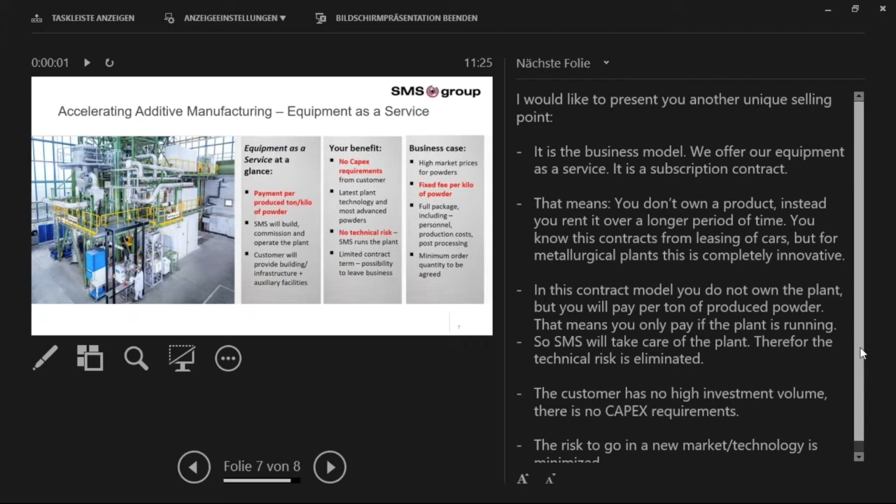And in this contract model, you do not own the plant, as I said, but you will pay per ton or kilogram of produced powder, meaning you only pay if the plant is producing, if the plant is running. So SMS will take care of the plant, will take care of the service, and therefore the technical risk is eliminated for the customer. So the customer has no high investment volume, there's no capex requirements, which lowers the risks. And of course, the risk to go into new markets, into new technologies is also minimized with this business model we offer.

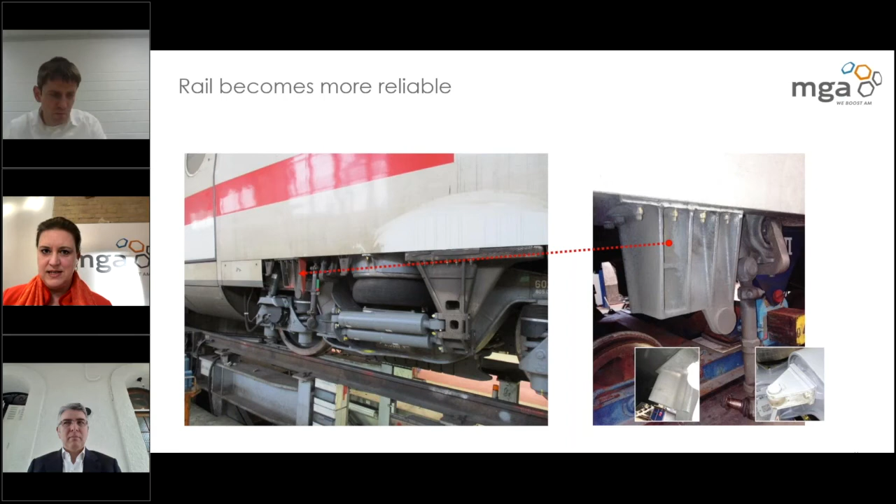So coming to the a bit bigger parts in additive manufacturing, we also print huge metal parts made with the technology which is called wire arc additive manufacturing. And therefore we print safety relevant parts. So this is linked to an ICE high-speed train, which goes more than 350 kilometers per hour. And of course, that part needs to be tested, which we can see on the next slide. So we have to take a real close look on the quality of such parts. And how we do this, you see on the next slide.

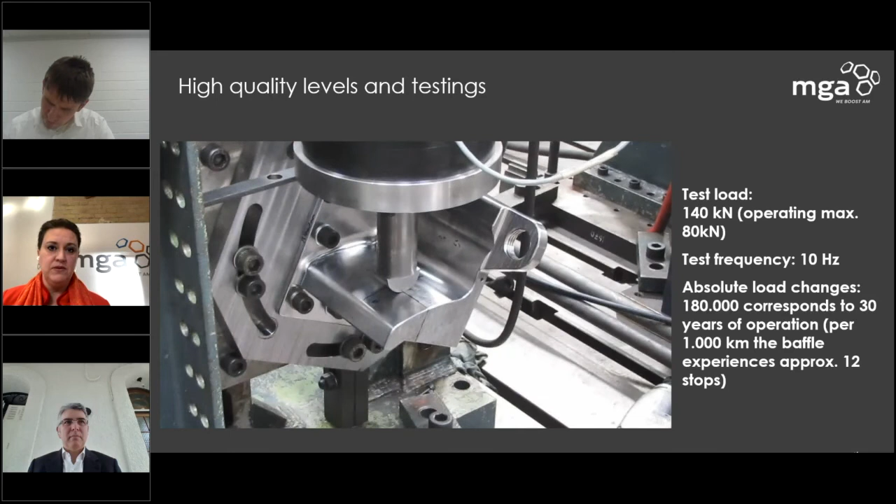So here we put it on a test stand and we simulated another 30 years of operation. We just needed it for a couple, like 5 to 8 years. But now we really know that this part is definitely working and can be used for safety relevant parts. Next slide, please.

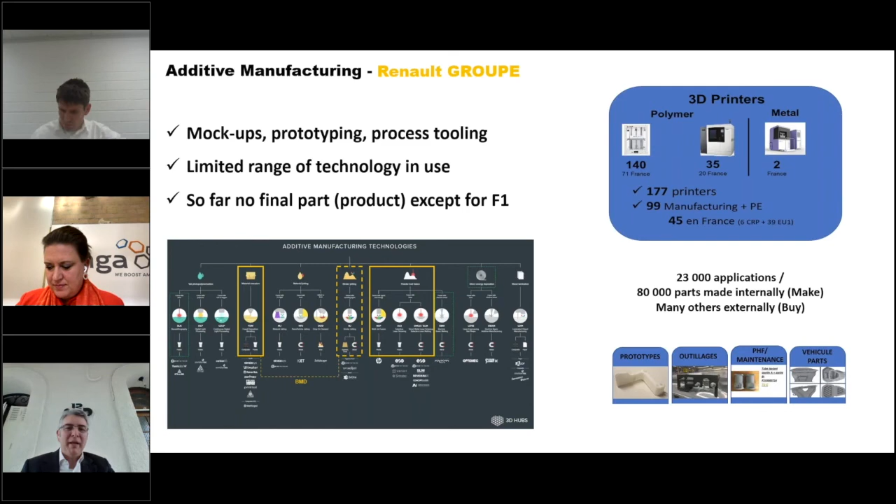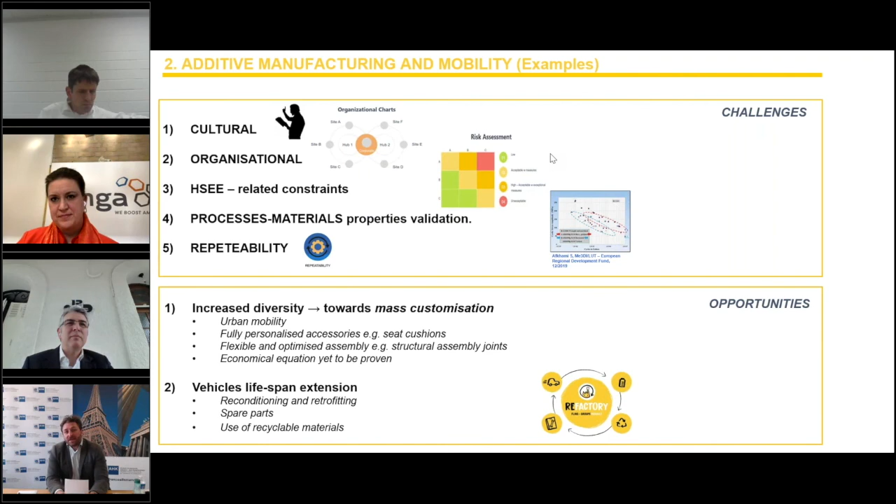Thank you very much, Fernando, for these explanations. The subject of safety has been raised several times; we'll jump to that afterwards. Even though the question's already been a bit answered, I wanted to ask you all, since mobility is an aggregate of numerous industries, what is for you the greatest potential of using additive manufacturing in yours? I know it's already been evoked a little, but in depth, could you tell us more? We'll start with Martin.

Well, I see the greatest potential right now for us, because we are manufacturing these internally with the know-how developed over the last years, in conformal cooled tooling inserts, also jigs and fixtures for enhancing the production methods and processes. Part development process, spare parts, prototyping, that's more or less technology set up by suppliers, also by us a little bit. We develop new parameters for faster printing processes, but I see the biggest potential today in these conformal cooled tool inserts. All right, thank you very much, Martin.

Fernando, what is for you the greatest potential? We cannot hear you. Yeah, we can hear you now. Yes, okay, thanks. Sorry for that.

Well, I insist on some of the things that I already mentioned. I think additive manufacturing has the potential to revolutionize completely the after-sales market supply chain, which will also have a positive impact on the environmental aspect, with the notion of distributed production. But there's a long list. In our case, I mentioned that we have used additive manufacturing for rapid prototyping, but I think there's a huge potential to go even further, consolidating additive manufacturing to accelerate product and process development.